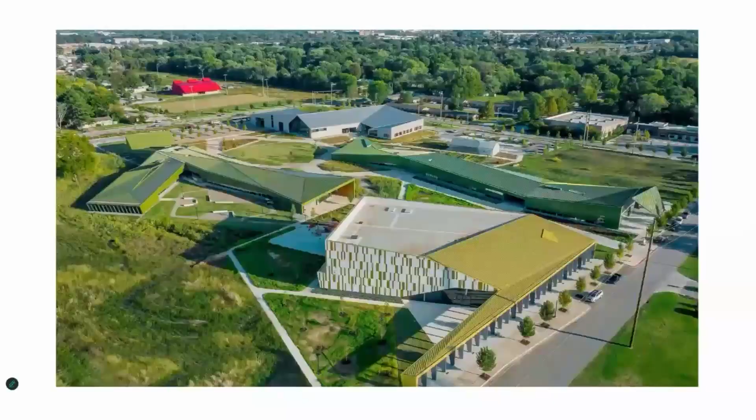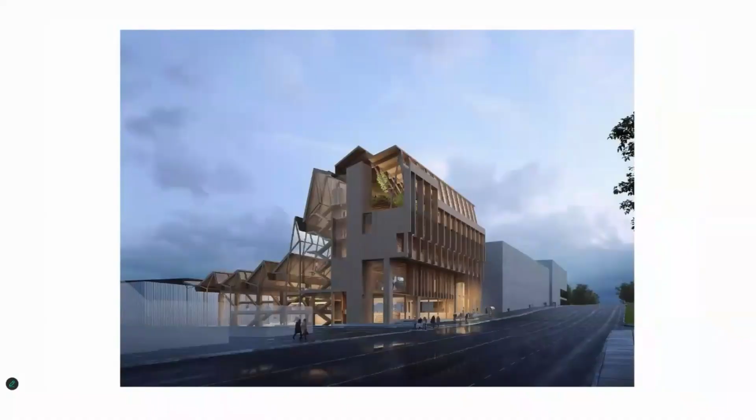With the opening of the Crystal Bridges Museum of Art in 2011, Northwest Arkansas experienced a culture-altering moment. Art, design, and hospitality became central to the region's identity and a catalyst for growth. Continuing through the cities of Rogers and Springdale, the region is also home to another global headquarters, J.B. Hunt Trucking. Together with Walmart and Tyson Foods, these industries have shaped Northwest Arkansas's growth and vitality for years. The presence of the Walton Family Foundation, through the Foundation's Design Excellence Program - an initiative that prioritizes high-quality architecture, landscape, and public space design - has really become a driver of community life and civic vitality. We're incredibly lucky to call Fayetteville home.

It's been ranked among the top 10 best places to live in the country for 8 consecutive years, shaped by a strong public university, weekly farmer markets, extensive trail networks, and a close-knit civic culture.

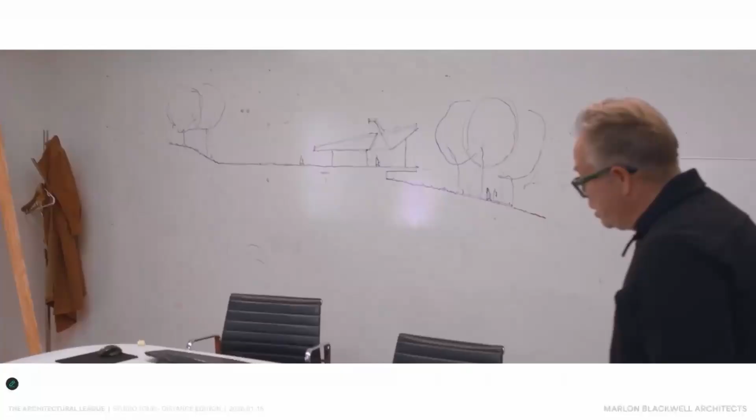So another conference area here. Our studios, designers, one open big office. We didn't have any corner offices or anything like that. Ati and I sit in the open, it's like everybody else. I think it promotes collaboration - the process is always sort of in front of us, and we're always enmeshed in it.

Yes, these are - what would you call these? Our adventures in camo. We still do most of all of our models by hand - different sort of light studies for light chimneys. Usually have 2 or 3 people working away on the models, just really helping us realize the spatial and formal implications of what we're doing.

Also messy, like a storage - well, like a workshop, yeah. It's our workshop. So we'll go upstairs.

This is my material library. We store a lot of our material here, not only for building material - I like to be able to touch and feel and have the actual color and texture evaluated. So we use this a lot.

So this is what we call the bear cave here. This is our office lounge, where we come up on a Friday afternoon, a place to just hang out. But anyways, that's a whole upstairs mezzanine here, and of course, kind of a nice place to really enjoy the workspace more - the upper mezzanine.

You can see up here, this is all our archives, which we get through the other room, but all of that is sort of out in the open, the models.

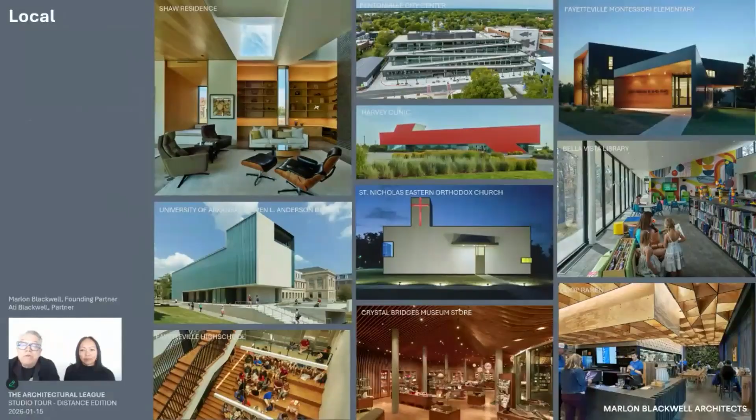From our origins, the early projects established an approach focused on clarity and restraint, and a slight weirdness in some cases. Our local projects allow us to stay closely connected to our community and the opportunity to work at many scales and different program types right in our own backyard. Our national projects expand our practice into new climates, cultures, and building types, strengthening our ability to adapt while remaining consistent with our values.

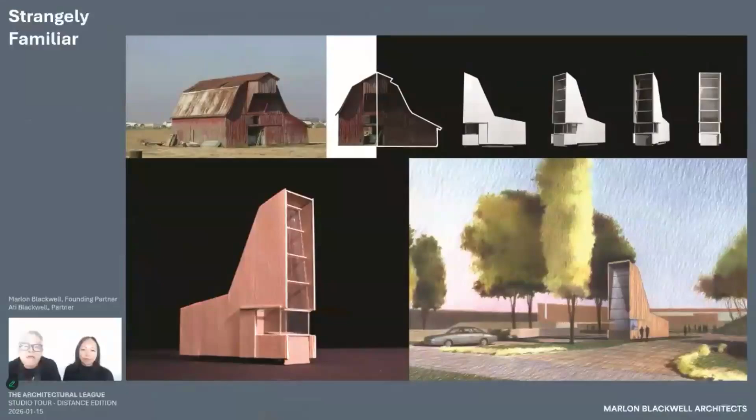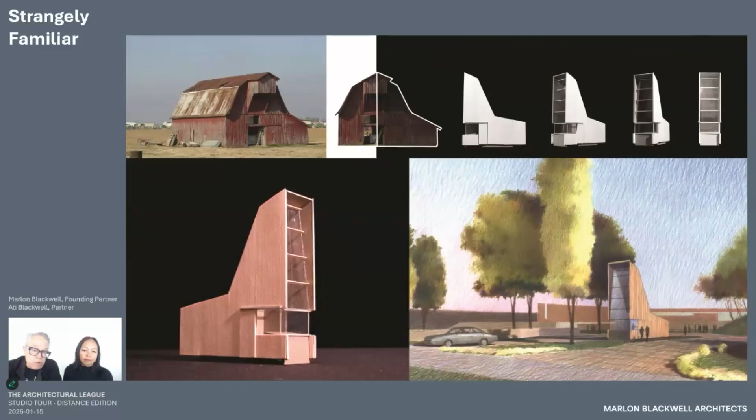Many of our projects interpret familiar forms in new ways. This approach helps buildings feel both recognizable and specific to their place. We like to say it's the task of recreating strangeness, and that's what we like to do. Across our work, we're interested in transforming common things into the uncommon, finding architectural potential in familiar forms and materials. We're drawn to everyday typologies and the potential they hold. The essence of our radical practice lies in transforming those familiar forms into architecture with renewed public meaning.

For us, radical practice is not about being avant-garde or revolutionary for its own sake. It's really about being fundamental, rooted in the original meaning of the word radical, or from the root. It reflects an ethical, social, and intellectual commitment to the common good, grounding our work in the essential values, needs, and context of the communities we serve. In a time when this approach is increasingly rare, we see it as both necessary and enduring.

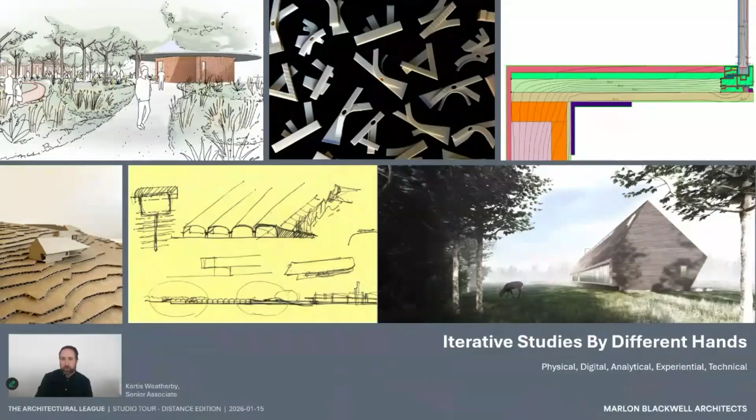This collection of images highlights some of the diverse tools that our staff have brought to us to use for exploration that are physical, digital, analytical, experiential. We're all generalists in the office, each with different strengths, but as we work as small project teams, we continually support each other when key skills are needed. With each new team member to the office, we discover a new tool or a new way to use an older one.

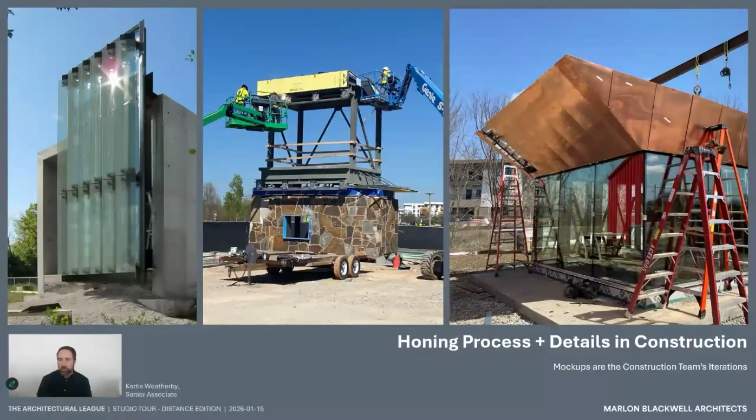For us, construction is not the end of design. It is design in and of itself. We use mock-ups and fabrication studies with careful and detailed observations of construction sequence, material tolerance, and craft to ensure that contractors and fabricators are practiced in the unique needs of coordination required to realize the ambitions and aspirations of each specific work, which we will now pivot to discussing in a few examples.

Our first project is the Columbus, Indiana Air Traffic Control Tower, which has just begun construction. Working in a city with an active, rich, modernist legacy like Columbus, we knew this tower must do more. It needed to create a radical vertical statement. Columbus is a city of towers, civic, religious, and structural. These elements dot the skyline and mark both key urban spaces and are visible gateways into the city. We knew the control tower needed to speak to these same aspirations. The history of the tower of this airfield, from its first World War II military installation to its current modest incarnation, did not speak to those aspirations. So we studied formally, how could we express this bold difference and make a civic sculpture?

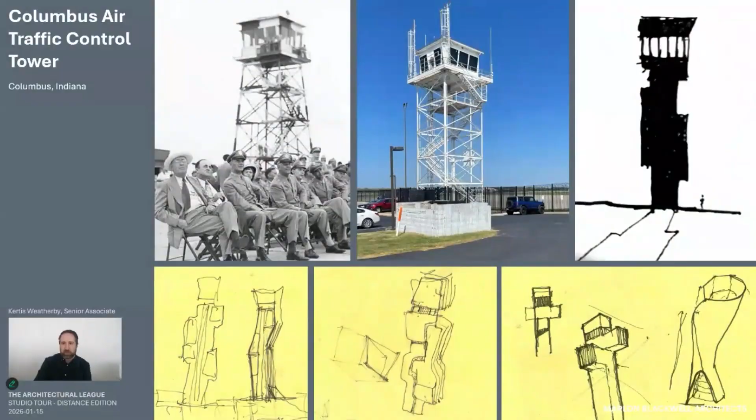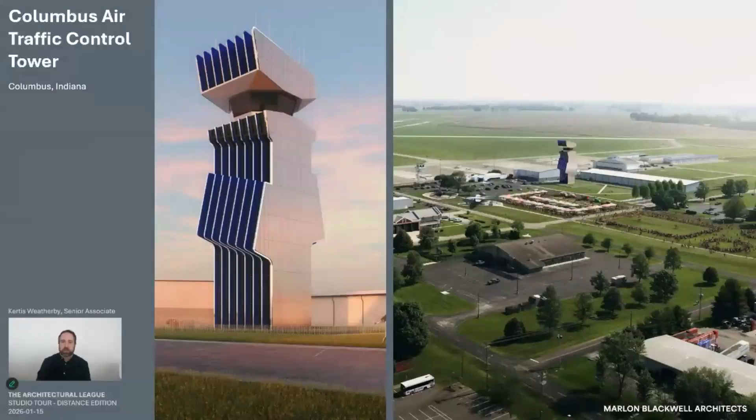Our wide range of formal exploration followed, from orthogonal to fluid, drawing from aircraft history, architectural precedent, and even A Christmas Story — you can see the fragile lamp there in the center. Slowly, the strategy evolved, merging fluidity, shifting volumes, and strong verticality. Standing at the edge of the airfield, the tower defines a threshold between movement and arrival, infrastructure and city. Its stainless steel facade and radius forms evoke both P-51 Mustangs and mid-century triumphs like Saarinen's Gateway Arch.

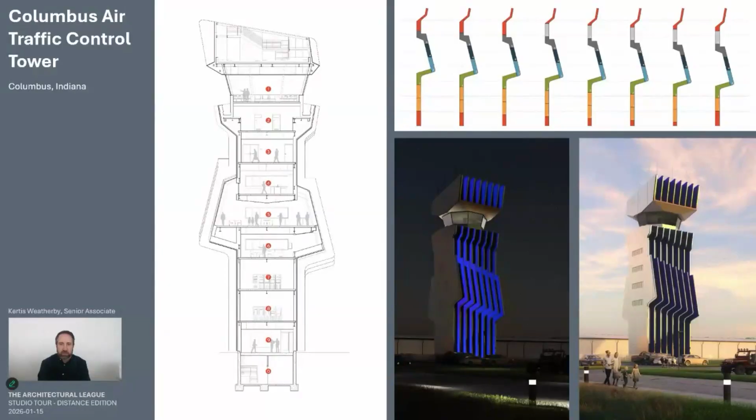The east and west facades are defined by serial vertical fins that wrap the tower's iconic form and emphasize its unique qualities both by day and when lit at night. They're heavily studied and optimized for both unitized offsite fabrication and lighting integration. Lighting strategies, which began as LED ribbons tracing the fins that presented installation and maintenance challenges, have been refined into a strategy of carefully placed and lensed light fixtures at multiple locations, both in-grade and interior to the building.

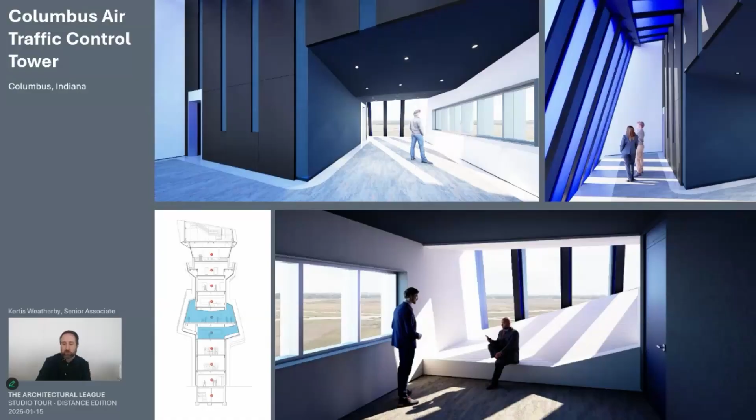While a typical control tower program is little more than a vertical shaft connecting to the observation cab at the top, here it is transformed with the addition of the briefing room, a space that expands the floor plate sitting at the height of the existing tower, where airport operators can host events to introduce guests to what happens in these generally mysterious and hidden environments, giving them an opportunity to occupy the space created between the fins. Columbus Tower stands as an example of how integrating public space and civic purpose can transform even the most technical and instrumental programs.

We boldly reimagined a typology meant for viewing without being seen into a focus for public gathering. When completed, the bold figure of the tower will also host a laser projection display where everything from movies, events, and public art will intensify the radicality of this new tower.

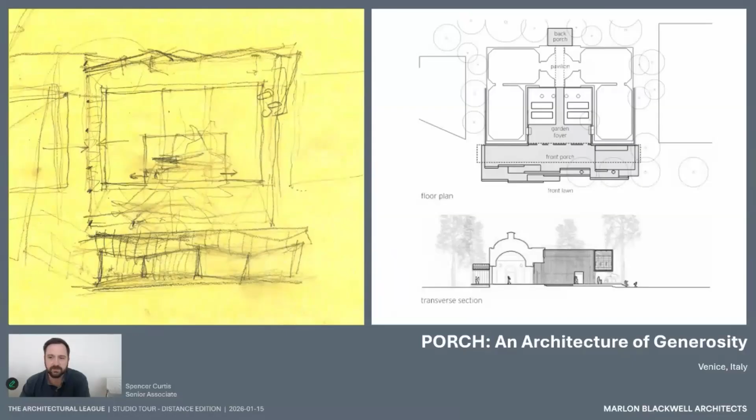Porch is a project we developed for last year's Architecture Biennale at the U.S. Pavilion. It takes on a contemporary infill condition, drawing from regional building traditions and shared human behaviors.

Key design components studied and incorporated into the concept design were spaces like the stage, where performances, readings, and demonstrations happen, the gathering porch, a place to meet, share, and discover, and ancillary spaces for repose, seating, and swinging. All of these spaces and connections are covered by a large canopy that filters light, creating shade while also providing passive ventilation.

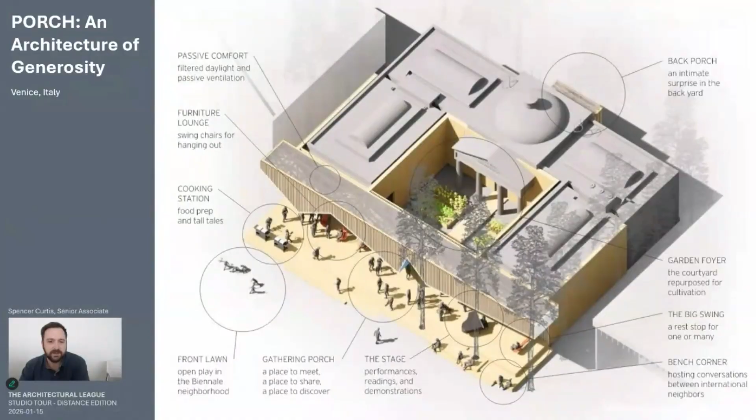Another challenge that we took as an opportunity was the importance to respect the nearby Israeli pavilion to the left and the Nordic pavilions to the right. We achieved this by raising the edges and shaping the soffit, which also helped create moments of compression and release while moving under and through the porch.

We also studied the importance of using the existing U.S. Pavilion courtyard and morphing it into a fully contained gathering space for performances. As Marlon would like to say, where there is shade, there are people.

Now, quickly, I'd like to speak about the construction of the built elements themselves. Using techniques MBA has learned over years, and from past projects such as a bike barn, the design was envisioned as a simple repetitive truss system hanging from two primary beams above that could be fabricated off-site and brought in. However, we learned that the local Italian craftsmen didn't quite have those techniques in their toolbox, and we were limited by the size of members that could be brought to site by boat.

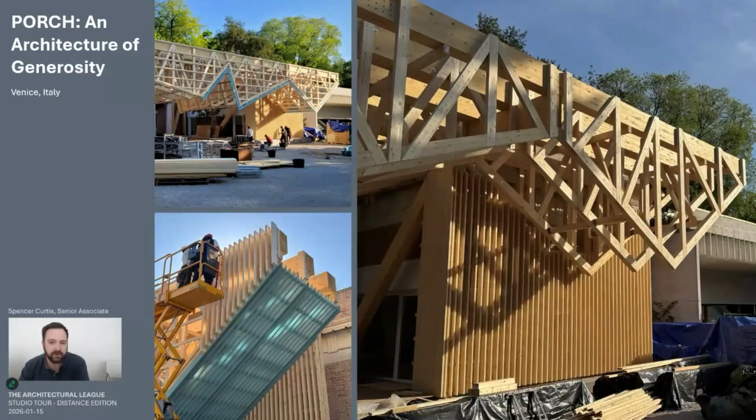Luckily, we were partnered with an incredible contractor, Wolf Systems, who were able to take our creative vision and apply their local craft and techniques to create the structure you see here. This highlights the importance of collaboration even when you're thousands of miles apart.

The result was a striking intervention that pulled people in from all over, including, as mentioned earlier, our whole staff being able to go visit the Porch project on the opening weekend of the Biennale.

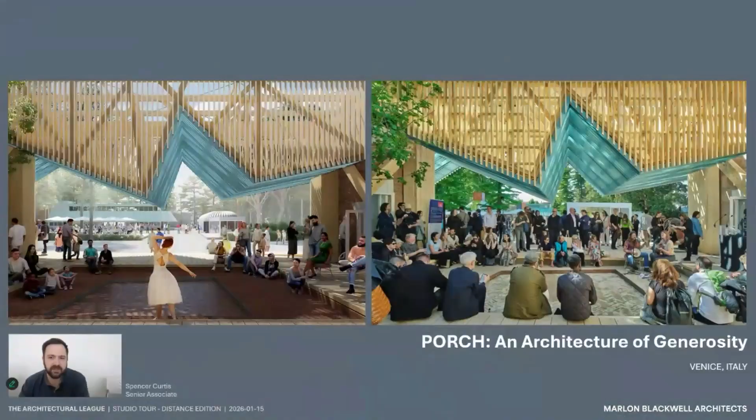From rendering to reality, the acceptance, use, and excitement of this space exceeded far beyond our hopes, especially when visual programming organized by the Momentary of Crystal Bridges was interactive in the space.

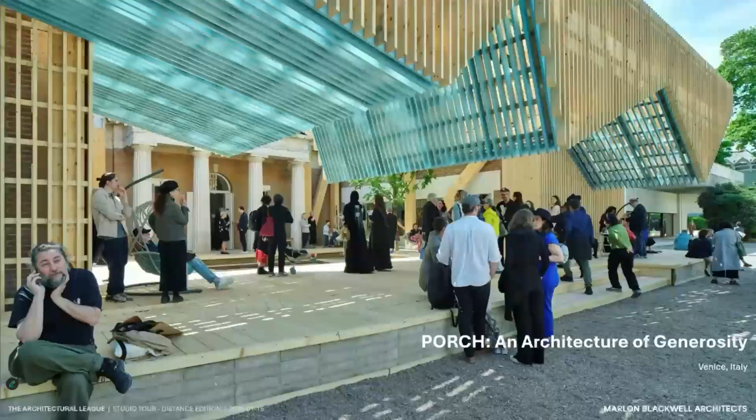This next image highlights the porch as a threshold, neither fully interior nor exterior. It also highlights the materials such as the rammed earth, where our collaborators used local Venice soils to create bricks that the deck and conversation pits rest on.

And lastly, the exterior intervention was only half of the overall Porch project. The interior condition, created by Jonathan Bolkins and the Porch commissioners, remains an open and shared space, reinforcing the idea of collective use. The space is filled with boxes that were created and curated by over 50 artists and architects with their interpretations of what Porch means.

In the end, this project concludes as an example of how thoughtful collaboration can bring the feeling of the American porch all the way to historic Venice, Italy.

Now, bringing you all the way back to Arkansas, let's talk about this next project, the Thaden School campus. Thaden School is an independent school composed of multiple buildings on one campus, creating curated learning and gathering spaces.

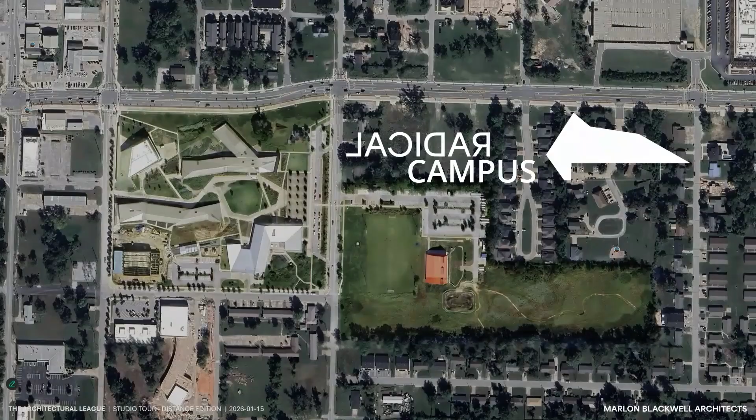Located just south of downtown Bentonville, the site for the project was once home to Bentonville High School, where Louise Thaden attended in the early 1900s. Later, the site became home to the Benton County Fairgrounds, and remained open space until 2016, when MBA was approached alongside our other design collaborators to master plan and design the new Thaden campus.

One quick note on Louise Thaden, whom the campus is named after. She was an American aviation pioneer and the first woman to win the Bendix Trophy.

To create such a campus, close and consistent collaboration between the design teams, school leadership, educators, students, community groups, and really everyone involved was vital to the project's success. This process helped align the master planning and architecture to focus on how learning spaces can be reimagined instead of relying on conventional school methods.

The main design partners for this project consisted of EskewDumezRipple, Marlon Blackwell Architects, and Andropogon, the project's landscape architects. Through close collaboration, we developed a system where each building was able to focus on a primary curriculum of study, while also being mindful to help direct connections to landscape through covered and uncovered outdoor spaces.

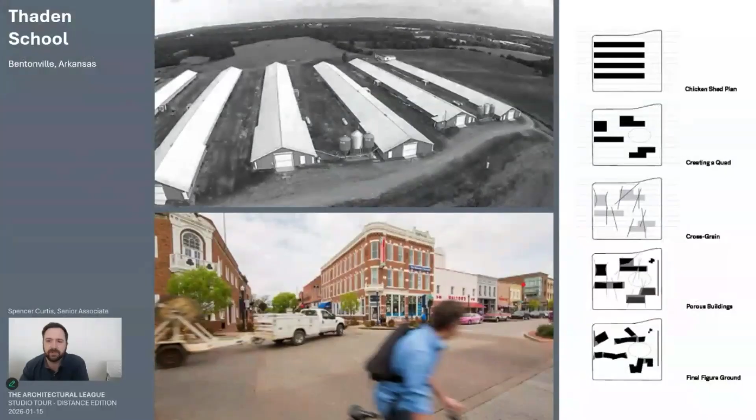The organization of the campus buildings drew inspiration from local structures to create a network of learning environments rather than a centralized institution commonly found. This approach allowed for a variety of unique and interconnected spaces.

The classroom buildings are organized and scaled along the edges of the campus, while the two larger buildings, the performance building and the home building, held the corners. This organization supports collaboration, flexibility, and importantly, visibility across all learning spaces.

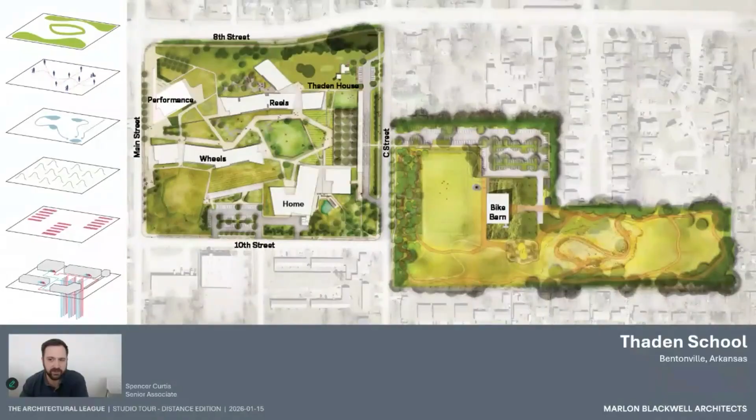As mentioned earlier, each building program focuses on a primary learning type, as we'll highlight here shortly. Together, however, they form one large classroom, a campus with no fences, where learning happens internally and externally.

We'll start first with the home building, designed by EskewDumezRipple, which supports daily life and gathering on the campus. The home building features spaces such as the campus library, cafeteria, and cooking classes, where students can learn and enjoy shared meals together. Next is the Reels building.

Designed by MBA, its primary focus was on art and film, filmmaking, and other creative avenues. The building itself, which also houses the campus administration functions, converts to a movie screen where films created by students are projected and experienced by both the students and the broader community.

These types of ideas helped inform the geometry of the building, enhancing spaces that are typically dull in schools to spaces that are well lit and enjoyable to be in.

The performance building supports assemblies, presentations, and shared events for the entire school community. Designed for everyday use and formal gatherings, it functions as a civic space within the campus, and with a 300-foot-long loggia, it creates outdoor event space and again welcomes the broader community into the campus.

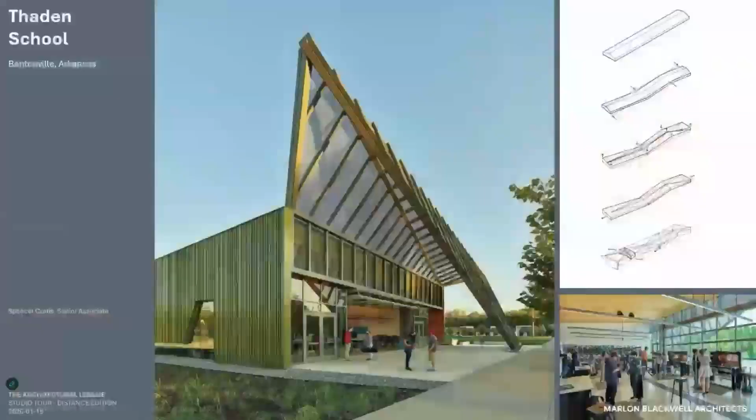The Wheels building reflects the school's emphasis on mobility, movement, and learning that is shaped by the strong mountain biking community of Northwest Arkansas. Wheels supports cycling, robotics, repairs, and hands-on experimentation, blurring the line between infrastructure, workshop, and classroom.

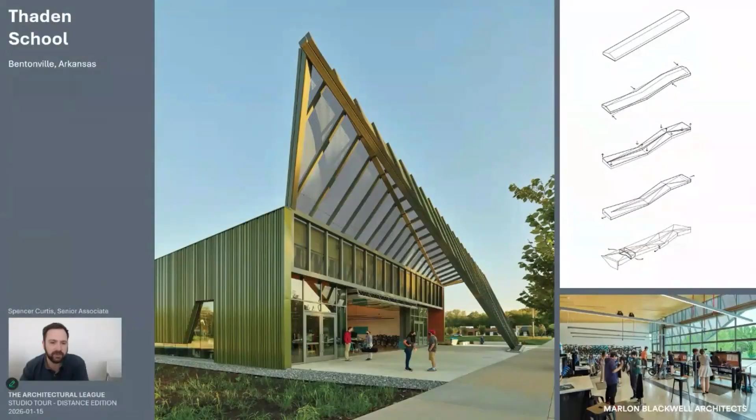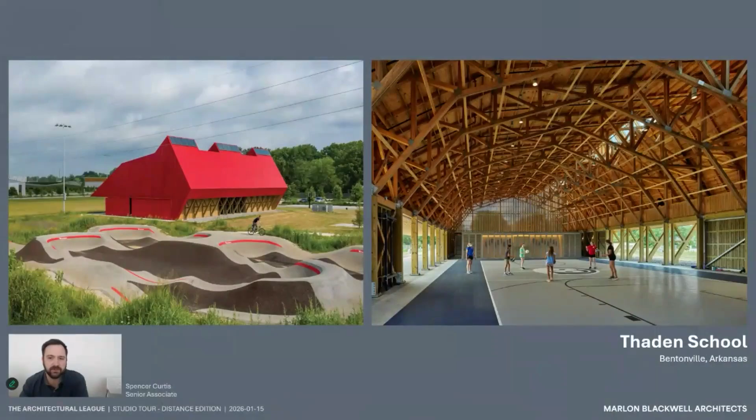And lastly, the Bike Barn, which serves as an active hub for movement and sports on campus with a bike park and multiple fields along its perimeter. The building functions as an extension of outdoor activity and reflects the school's emphasis on health and participation.

In result, the Thaden campus is a place for students to be active, play sports, learn hands-on techniques, and gather together, providing a balance of education that ignites passion for discovery and learning.

And now with that, I'll pass the mic over to Michael Davis to show you more of an upcoming project, Greenfield Farm, a radical transformation of an existing landscape.

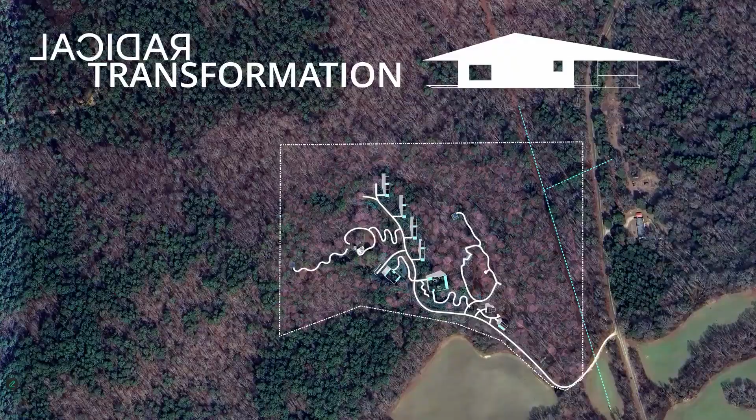All right, thanks Spencer. I'm happy to be here to talk about this project that's been under development for about 2 years in our office so far.

So the Greenfield Farm Writers Residency is a retreat-style residency celebrating Mississippi's land, history, and culture. Developed by the University of Mississippi and the Mississippi Lab, the project will be the first significant infrastructure investment our nation makes to grow and amplify the power of Mississippi narratives to make positive American change.

The project is located on the remaining 20 acres of the farm once owned by acclaimed author William Faulkner, which he purchased in 1938 after selling the movie rights to one of his novels.

He then ran the 362-acre property as a working farm and a creative sanctuary that deeply shaped his later work. The site is located halfway between New Albany, William Faulkner's birthplace, and Oxford, Mississippi, where he lived for most of his life. At Greenfield Farm, Faulkner immersed himself in rural life.

Farmers here raised mules and grew cotton and corn, and his experiences here influenced the characters, settings, and events of his later writings. However, time has transformed this place. What was once cleared farmland has now begun to be reclaimed as a series of natural Mississippi landscapes.

We worked closely with the university and native habitats, our landscape architects, and embarked on a 6-month process at the beginning of the design to develop a cultural landscape study to guide the development of the site, both now and in the future. The conclusion reached was that this is a landscape in need of restoration and regeneration, not back to the farm, but as an example of a native Mississippi landscape.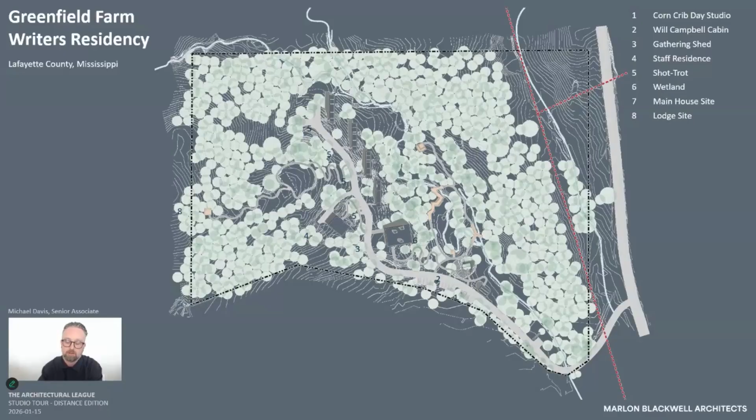The day-use studios will give new life to 2 existing structures: the corn crib, which is one of the remaining structures on the farm, and the Will D. Campbell cabin, a log cabin which will be moved from Mount Juliet, Tennessee to the site.

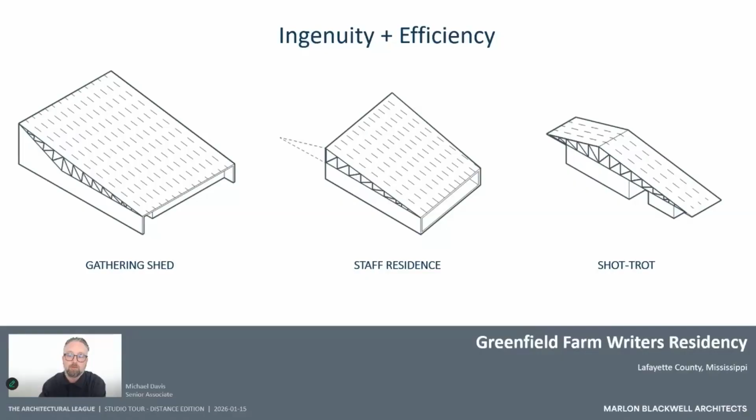As we developed the new structures, a central concept emerged during the design, which was that of ingenuity and efficiency, culminating in the development of a truss geometry that could be shared between the 3 new structures. This truss is deployed in various ways to shape the interior space and define the figures of the buildings.

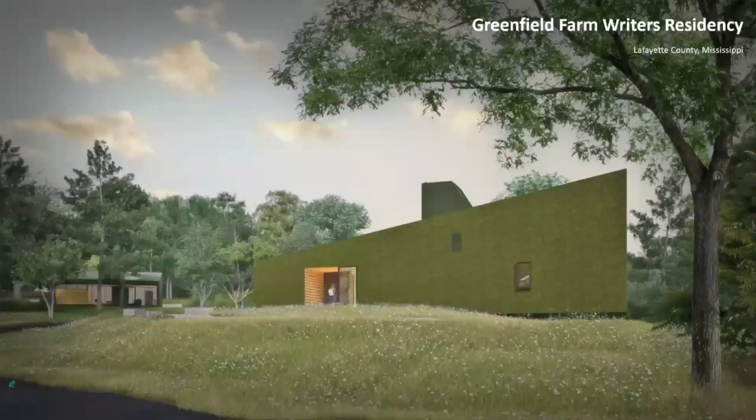We also looked to rural typologies for inspiration. For the gathering building, the typology of the barn served as the starting point, including the barn that once stood at Greenfield Farm. The gathering shed, as it became known during design, is located centrally along the drive, and its sloping roof and simple form recalls the barns that inspired it.

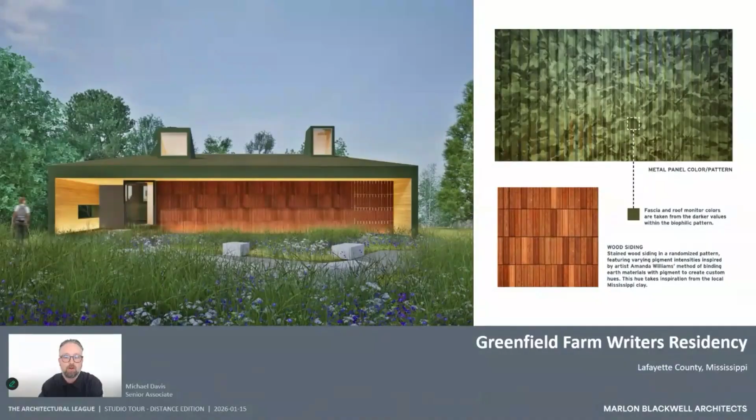As a counterpoint to the sloping roof, a series of monitors bring light deep into the central spaces. The use of biophilic pattern corrugated metal and stained wood siding further the rural typology narrative, connecting these new structures to the farm vernacular, as well as drawing inspiration from the landscape itself.

The truss geometry is utilized in an inverted configuration to shape the space of the main gathering area. This space will be utilized as a space of gathering and community for the writers, and it also contains a library for their use while in residence.

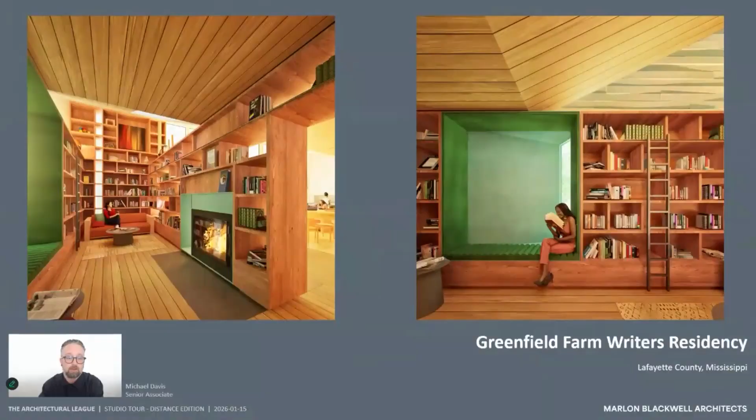Placed along the gently sloping portion of the site, the building gestures towards the wooded wetland that now exists at the location of the former farm pond, and becomes a welcoming beacon as night falls on the residency.

The writer residences were inspired by the rural farmhouses of Mississippi, specifically how their exterior space is created within the form and how they could potentially be hybridized and combined.

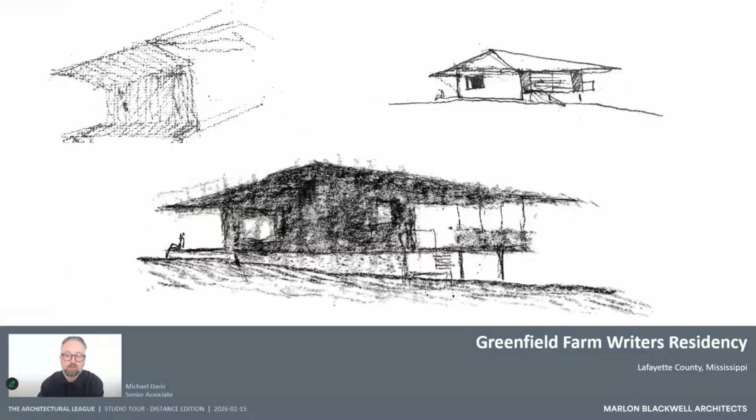This led to the development of what became known as the Shot Trot, a small residence for the writers with 2 distinct outdoor spaces, a front porch and a dog trot. The front porch is a carved space, created by the cantilevering trusses.

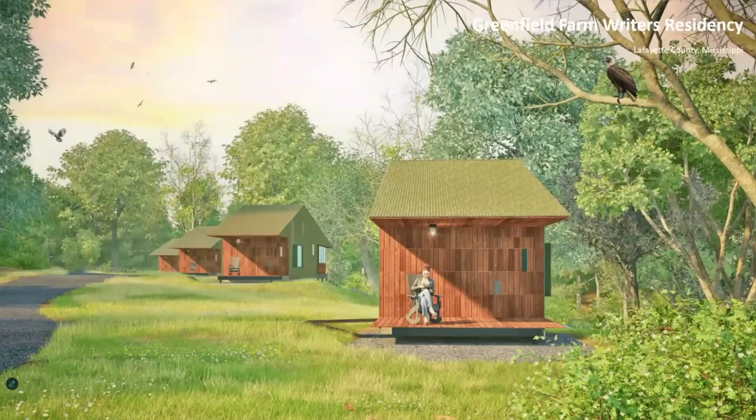Stained wood of various tones drawn from the Mississippi soil is utilized to painterly mark the entry to each structure. The plan is configured as a shotgun layout, but utilizes a dog trot to separate the studio space from the main residence, creating a separation between the living and working spaces, which was a crucial requirement that came directly from the stakeholder group of writers that we worked with.

The studios are directed out to the landscape. Salvaged haint blue beadboard from the main house, the home of Faulkner's brother, will be utilized as the ceilings in these spaces. The truss geometry here is a strangely familiar figure, an elongated gable that stretches out over the dog trot and studio, and out to the landscape beyond.

Construction on this project is anticipated to begin in Q2 of this year.

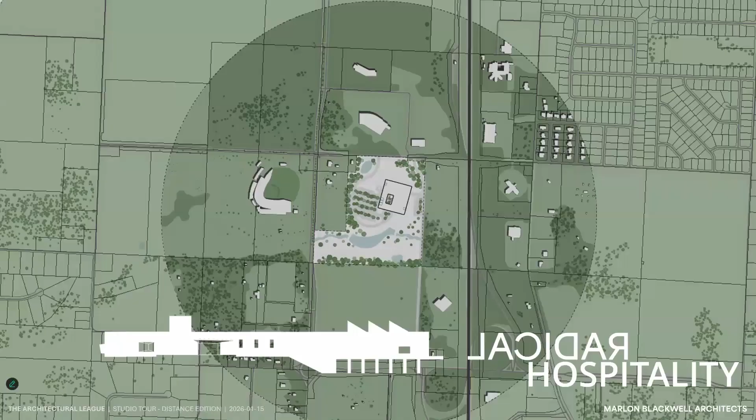Now we want to take a look at our new project under construction, an orthopedic micro hospital we like to call Radical Hospitality.

The UAMS Orthopedic and Sports Performance Center sits on a 30-acre meadow just off Interstate 49 in Springdale, Arkansas. Rather than asserting itself as a vertical object, the building walks and conforms into the existing topography, low, horizontal, and shaped by the site. From the beginning, we saw this as an opportunity to design a medical facility that supports healing and recovery with a hospitality focus by engaging itself closely to nature.

From the primary entrance on the lower level, you can see the plan. Visitors rise up to the second level at central courtyard that anchors the plan. Each of the program departments, like clinic, rehabs, and surgery, have direct visual access into this tranquil and calming space. Circulation for patients and providers are visually connected but maintain clear separations for efficiency and hygienic control.

Shaped through ongoing dialogue with the larger user group of surgeons, nurses, therapists, patients, and more, operational realities and lived experience inform decisions at every scale, from adjacencies to moments of rest for caregivers.

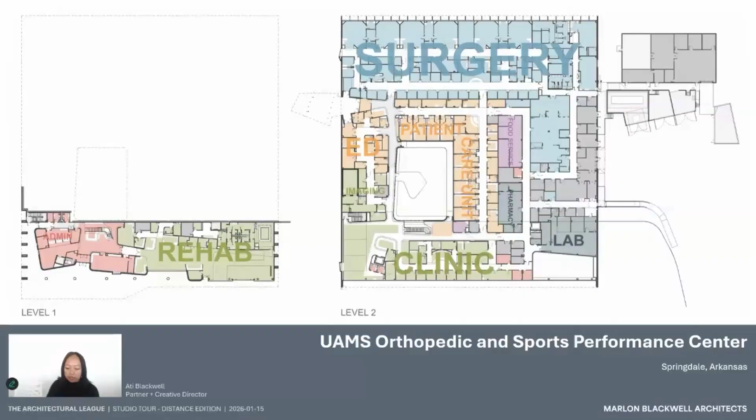Arrival is often the most tedious moment in a medical visit, where the transactional act of checking in and checking out is hurried through. We wanted this first touch, the moment of arrival, to be much more than utility. We prioritize art and beauty, calm and comfort, and natural light, of course, by establishing hospitality-forward gestures. By bringing in natural light, nature and greenery, furniture and furnishings that evoke the comfort and feeling of home, colors and textures that remind us that we are arriving at a nice hotel lobby or even your living room, would be more hospitable and less... hospital.

We developed a visual language of soft radius corners, rich materials, and clear forms. Interior spaces focus on providing comfort, beauty, and light of art and nature for wellness. By mixing materials, textures, and colors, we have choreographed vignettes of spaces and places to pause.

The wood-clad staircase leads visitors up its inviting form, bathed in natural light and overlooking the landscape of the central courtyard. The courtyard is the vibrant center of life in the building, creating a sense of wellness and health throughout its tranquil planting and design. As I'll show you more in a moment, we link each of the patient and public spaces directly to this courtyard.

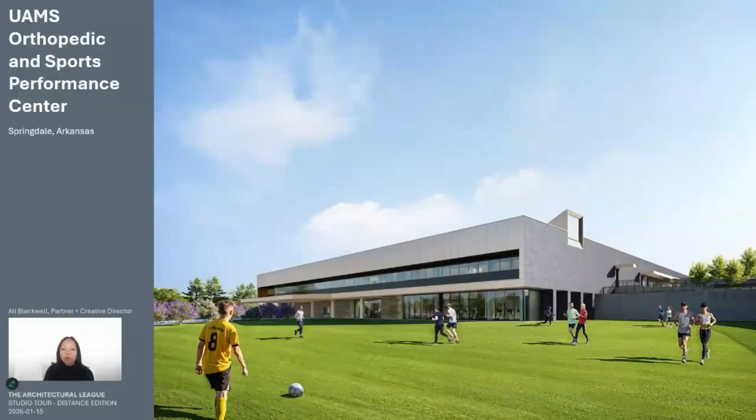This was both humane and practical. Patients recover more quickly with connection to nature, staff stress levels are reduced with access to daylight, and providers perform better when in an environment that they want to be in. During operations, for example, that can take many hours, staff are energized by seeing the outdoors, a welcome visual link not present in most technical, sterile, windowless operating rooms. We try to bring life and work outside as much as possible.

The PT gym is a great opportunity on this site. Like many spaces throughout the building, the sports performance gym is continually linked to nature through generous windows, clerestories, and roof monitors. It also has a large opening that connects the indoor training space directly to the outdoor performance fields, so that the work of training and care can flow seamlessly from inside to out.

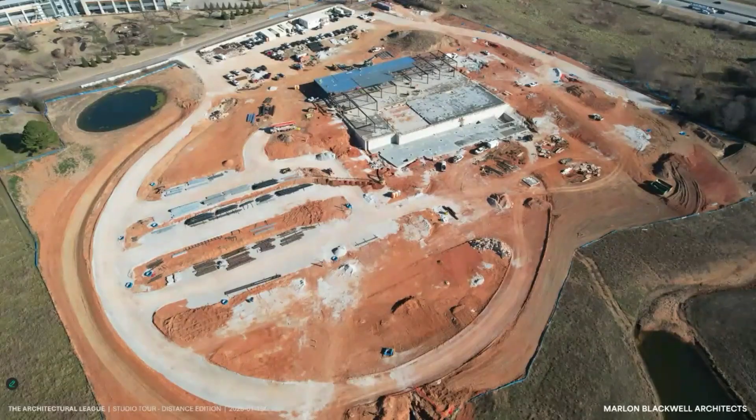We are now largely complete with the concrete and moving through the steel erection. As the steel frame emerges, the organization and scale of the building is starting to become legible in the landscape. The long horizontal structure will sit lightly on the site and integrate into the rolling hill.

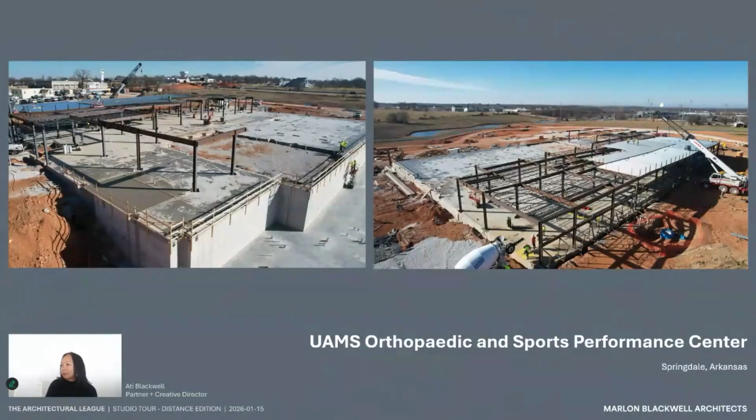Speaking of whole person and whole health, the Heartland Whole Health Institute offers a way of understanding place, how architecture can emerge from culture, landscape, material, and craft. It supports research, teaching, and community engagement focused on whole person health for individuals in charge of their own journey through health with their doctors. From the outset, the project asked how architecture might contribute to calm, focus, care, and healing.

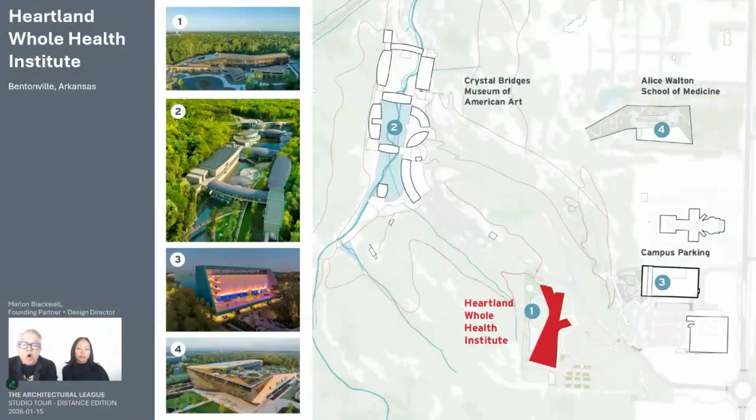Located on the campus of the Crystal Bridges Museum of American Art, the building is part of a growing art campus evolving into a broader health and education district. Anchored by Crystal Bridges, the Alice L. Walton School of Medicine, and Art Park, this convergence of art, nature, architecture, and wellness is reflected in the building's siting—open, connected, and always accessible to the public.

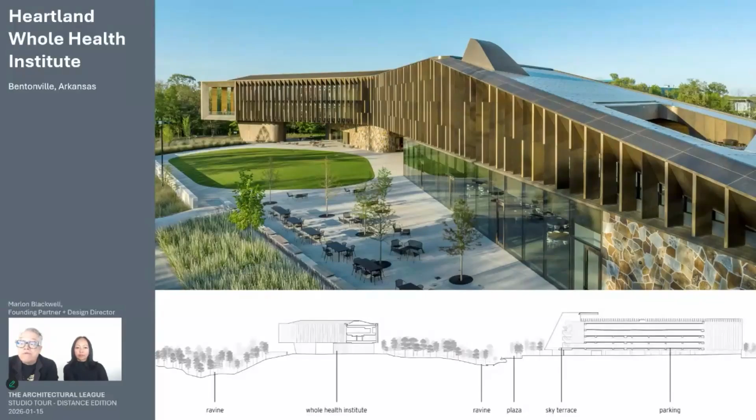The building is composed of a series of low connected volumes lifted gently above the ground plane, drawing inspiration from the Ozark topography of hills and valleys. This creates a porous arrangement, more like a natural dog trot, where porches, decks, and open passages allow people to flow easily through the building, reinforcing horizontality, clarity, connectivity, and a sense of ease on arrival.

Arrival is gradual and welcoming, guided by the landscape and a series of layered thresholds. The ground floor is open to the public—essentially an art museum with various event spaces and programming for the schools and museum, supporting shared programming with both, and prioritizing approachability and orientation over monumentality.

The Ozarks are defined by karst geology and dense forest cover, with nearly 60% of the region wooded in hardwood forest. These conditions shaped our material thinking, guiding choices that feel grounded, durable, and deeply connected to the place itself. Material choices are central to the project and to our interpretation of local craft.

By modernizing the local Ozark tradition of fieldstone cladding, the building is grounded both figuratively and literally. Locally sourced giraffe stone provides texture, warmth, and permanence, shaping how the building is experienced and understood as part of the material culture of this place.

Below, the building reads as a cave, anchored by stone and weight, and above, pre-weathered brass fins create a permeable edge with beveled profiles that filter light, allowing it to enter gradually and recall the experience of moving through a wooded landscape.

Material details reinforce the connection to place while elevating craft through careful study and testing. Full-scale mock-ups were used to refine construction, detailing, and connections, ensuring the materials perform well and feel right at the human scale. The building is lifted so the landscape can pass beneath it, reinforcing continuity between the ground and structure.

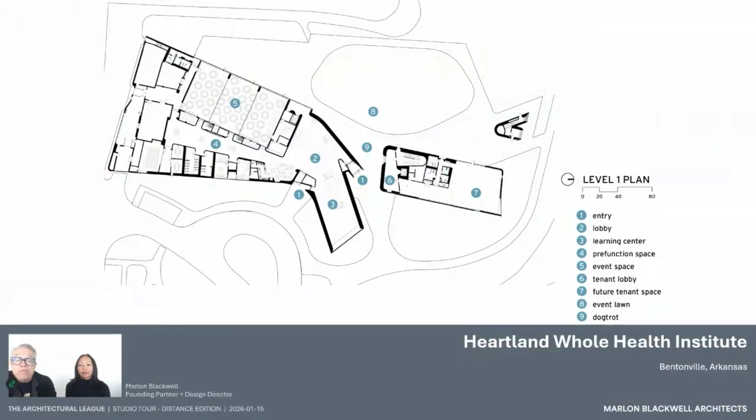Public, shared, and private programs are arranged in a clear gradient, while rounded room corners soften transitions and support a sense of ease throughout. The dog trot welcomes you in.

Circulation spaces are generous and legible, supporting intuitive movement through the building, while outward views maintain orientation and strengthen the connection to the surrounding landscape. In a sense, things just flow.

As you enter the lobby, you're welcomed by the materials themselves, like travertine stone floors and Venetian plaster walls that ground the space, while sculptural ceilings crafted from local pecan wood reinterpret the Arkansas forest canopy, introducing softness and care and bringing the qualities of both the cave and the forest into the interiors.

The interior palette draws inspiration from a painting owned by the Crystal Bridges Museum of American Art collection called Kindred Spirits by Asher B. Durand. The painting's muted colors and layered depth inform the building's use of color and pattern, shaping an atmosphere that feels calm, grounded, and connected to the natural world.

Materials such as travertine floors, locally sourced pecan ceiling, lime-based plaster, quartz surfaces, and unlacquered brass are used consistently throughout the interior to support continuity and ease. Natural wool carpets and upholstered furnishings add familiarity and comfort to the workplace. Each material was selected for warmth, tactility, and longevity, with emphasis on natural and renewable qualities.

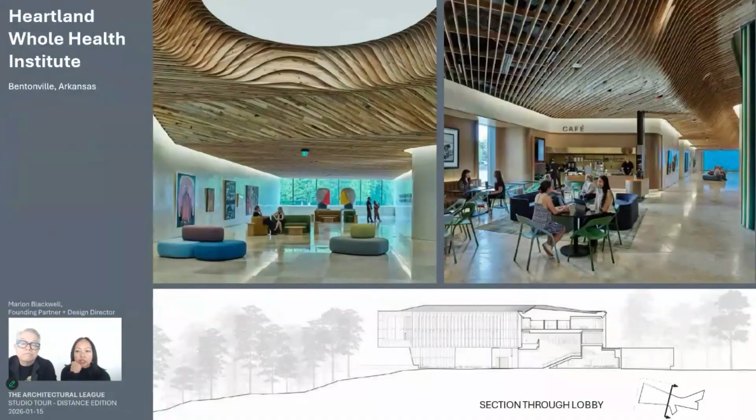Like our approach in the plan, curved surfaces and layered ceilings soften the scale and help large spaces feel approachable and human. Circulation areas become places to pause and linger, encouraging the building to be experienced slowly through a journey rather than all at once. Public-facing spaces welcome visitors, remaining closely connected to the daily activity. Research, learning, and community overlap visibly, reinforcing openness and a shared sense of purpose.

Movement through the building is clear and expressive, anchored by the main stair. Vertical circulation is treated as part of the spatial experience, supporting orientation and connection rather than being hidden away.

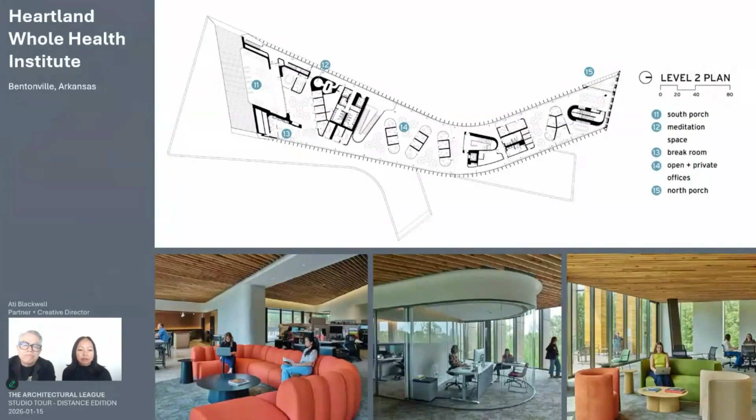Access to light and views was our guiding priority, which is why there are no corner offices. Offices are pulled away from the perimeter, so daylight and views are shared equally by everyone who walks or visits the place, while second floor offices overlook collaborative areas below, supporting connection, visibility, and focused work at the same time.

As part of wellness and a moment of pause, we designed a publicly accessible meditation space that brings in light from above and grazes the curved surface of the space. It is a moment of calm and contemplation.

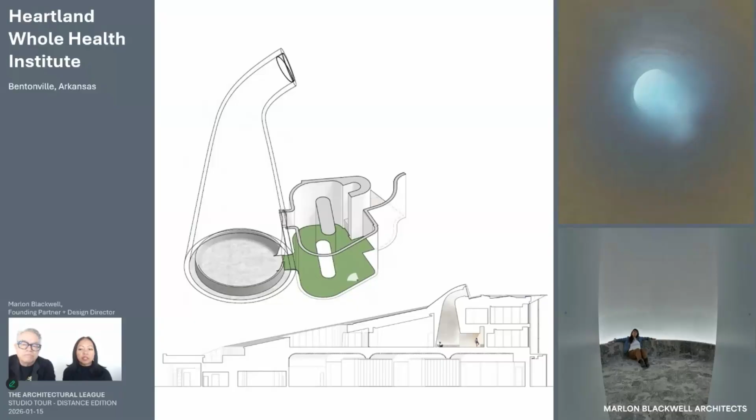The plaster wall absorbs sound, softens edges, and brings in light naturally, and the carved room feels muted, gentle, and still, like a vertical cave, a good place to go when you need a moment of calm in your day.

Architecture, interiors, and landscape are conceived as a single continuous system. Porches and thresholds create gentle transitions between inside and outside, supporting a layered experience that moves naturally between enclosure and openness. It really allows the folks there to follow the light, though they work in 27 different places throughout the building.

So moving from inward stillness to places of gathering, this project really establishes how architecture can become an active part of well-being.

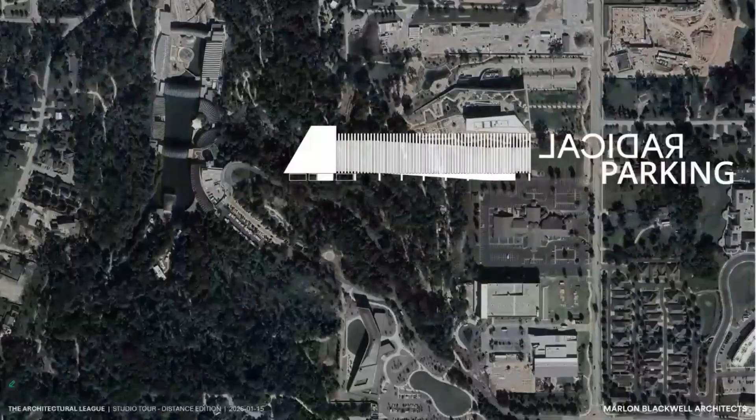So from here, we move across the street to a project that similarly rethinks everyday infrastructure as civic space. This leads us into the Art Park, a radical take on the parking structure.

Serving as a parking structure for the Crystal Bridges Museum campus, it becomes an opportunity to contribute to public life, the larger cultural landscape, as well as this whole issue about art.

The building sits at a point of convergence, acting as both a connector and destination within the city and the campus. We asked what more could a parking garage be, whether it might participate in the discourse of art.

And imagine it as a large proscenium where art and performance could interface directly with the adjacent Convergence Plaza, designed by Studio Bryan Hanes.

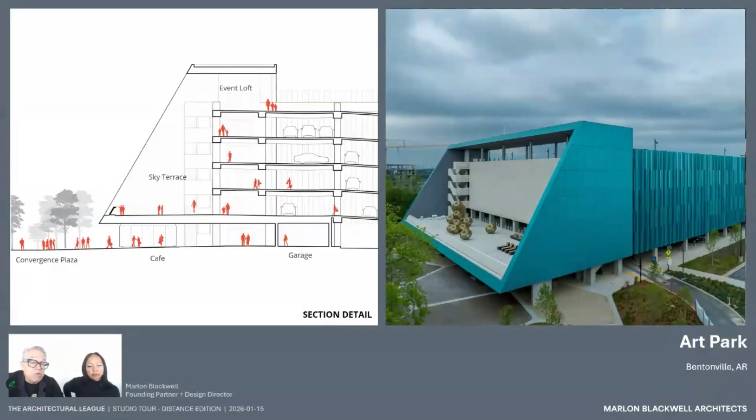This diagram makes the argument clear. Parking supports culture rather than the other way around.

The cafe, shop, and restrooms filter vertical movement from the garage to the plaza, while the sky terrace above offers an open, flexible space with endless opportunities for public life, events, and engagement.

Convergence Plaza also serves as a gateway to movement and play, connecting directly to the shuttle system, regional trail network, and a public splash and play zone. Together, these elements extend the plaza's role beyond a destination, linking culture, recreation, and everyday life, and of course, art.

It really has become a great central gathering place for the campus. The plaza serves as both an arrival and departure point, a place of common ground and transition that extends naturally into the underbelly of the parking garage.

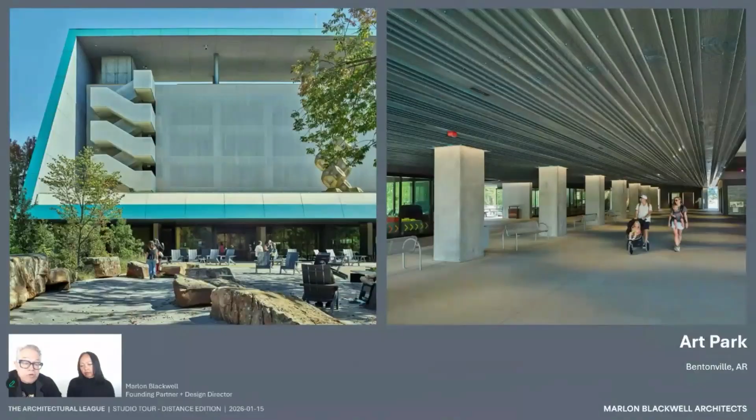Material continuity keeps the experience cohesive, even as programs shift. The structure remains legible, allowing people to understand how the building works as they move through it. The Art Park Cafe and bar operate as a lively in-between, fully open to the plaza.

It becomes a bold, unmistakable gesture of welcome, an energetic first signal that you've arrived at the campus, in someplace special, and concerned too about art.

Here, the lighting becomes a form of art in itself. The jelly jar lights scatter across the structure like fireflies, giving the building a soft, animated presence and a true garage experience.

At night, the building reads as active infrastructure, animated by light and use rather than hidden away. Together, these projects argue for architecture that is grounded, civic, and humane, where material, landscape, and experience are inseparable.